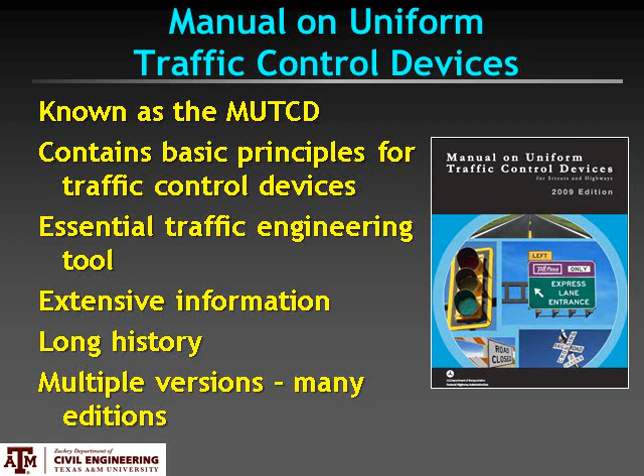And the 862 pages in the 2009 edition, which is the current edition, contain a great deal of information about the meaning, design, selection, installation, operation, and maintenance of traffic control devices. And it has a long history. There have been 10 different editions of the MUTCD.

It started with the original 1935 edition. There was another edition put out at the beginning of World War II, the post-war edition. Then early in the 60s, a 1961 edition, early in the 70s, a 1971 edition, an edition in 1978, another one in 1988, the 2000 edition, the 2003 edition, and then our current 2009 edition.

Now, the history that goes into the MUTCD actually goes back all the way to the days of the Roman Empire, when they would mark these stone columns on the side of roads with the distance to Rome, which was obviously the center of the Roman Empire. And even in colonial America, they would put up these road markers that would show the distance to significant cities.

Now, of course, they didn't have paved streets and sidewalks and traffic signs and signals like you see in this picture, but this is an example of the type of colonial America road marker that might be on the side of a trail. And then automobile travel began in the early part of the 20th century. And as the number of automobiles increased, the need for more detailed and more useful traffic control devices grew.

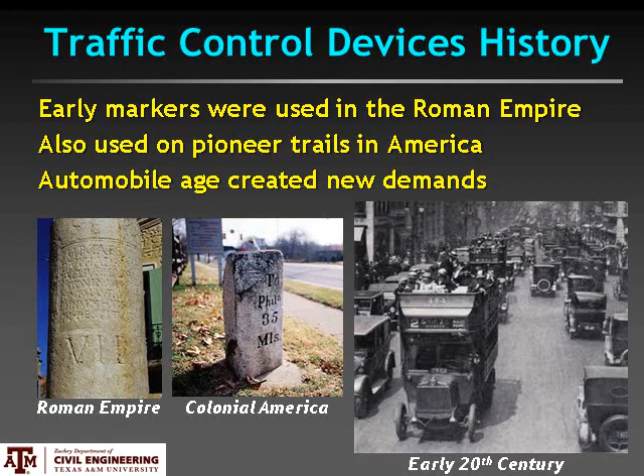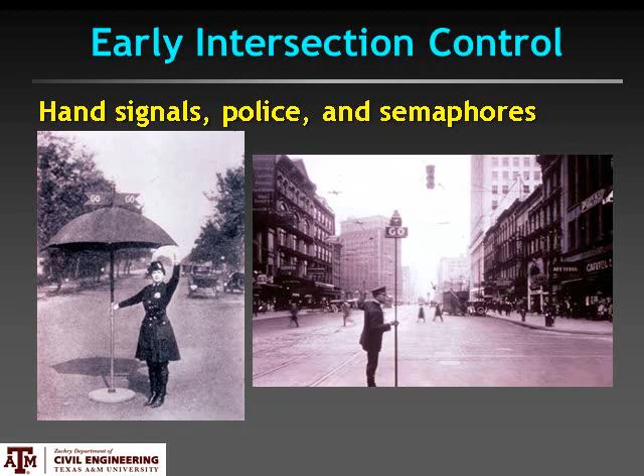Traffic signals and control at intersections was a big part of this early need for traffic control devices. When there were a relatively limited number of vehicles, they would put police officers in the center of the intersection, and they would hold up various types of semaphores and other signals that would be on a post, and you could see the word go from one street, and on the crossing street it would say stop, and the police officer simply rotated that 90 degrees back and forth to control the traffic at the intersection.

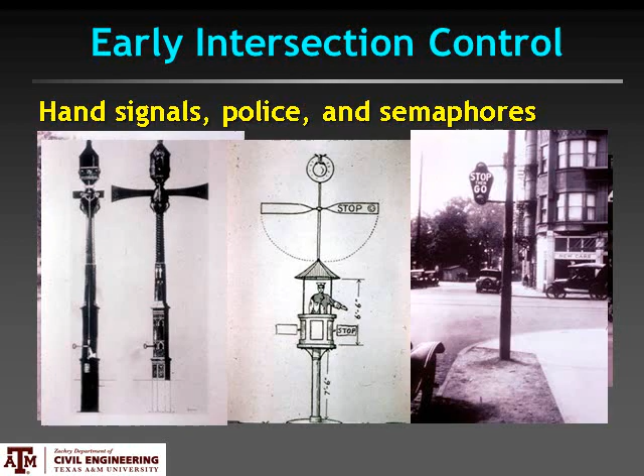The earliest signals were used in London, England, and used semaphores such as shown on the left. And then as the system progressed, we began to adopt some of the electrical indications that were used on railroads. And so we started seeing the red and green indications and the semaphore flags. And a lot of these were in towers or mounted on posts on the side of the road.

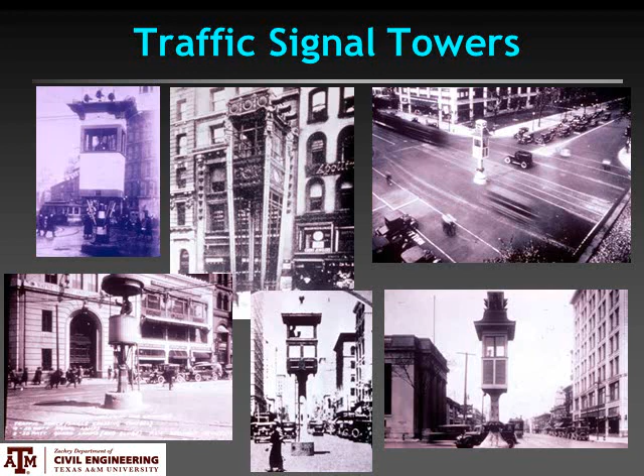In order to help the police officers see the traffic on the four approaches to an intersection, they started putting them in towers. And some of these towers were relatively low to the ground, others were really high. Some of them were real simple, others were very ornate. The signals were typically incorporated into the tower, and the police officers simply stood in the tower and looked at the traffic on each of the roads and decided when to change the signal for a given road from red to green and vice versa.

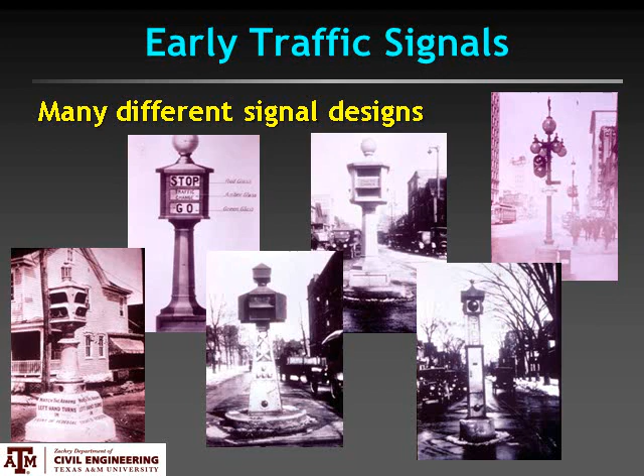Now, I said red and green because in many of the early signals, those were the only two colors that were used, and they weren't always round indications either. Sometimes they were rectangular, sometimes they were square. You can see here that some of them had word messages, some of them included a yellow interval, and some of them did not. So in the early part of the 20th century, all the way into the 20s and 30s, there was no standardization of traffic signal design.

Some of them had large numbers of indications. Some of them used combinations of semaphores and signal lights. And the position of the different colors was not even standardized. Sometimes you saw red on top, sometimes green was on top.

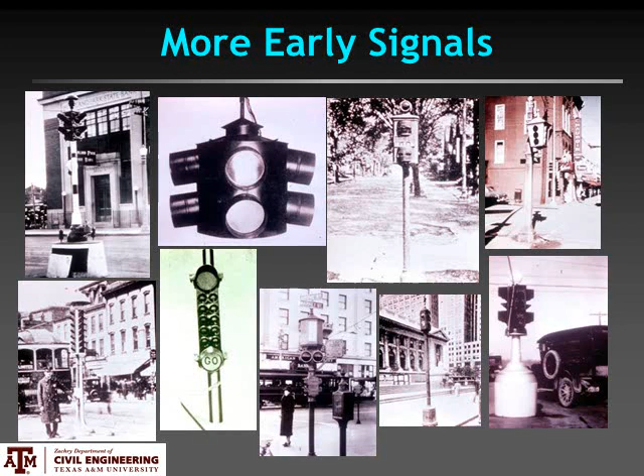Traffic signs likewise were not very uniform. The appearance of a sign took on whatever the designer of that sign, essentially the person that painted the sign, wanted it to look like. And so it was not unusual to see words like warning or caution or danger on many of the early signs. And in fact, police departments actually were responsible for many of the early traffic signs that were put out on roadways.

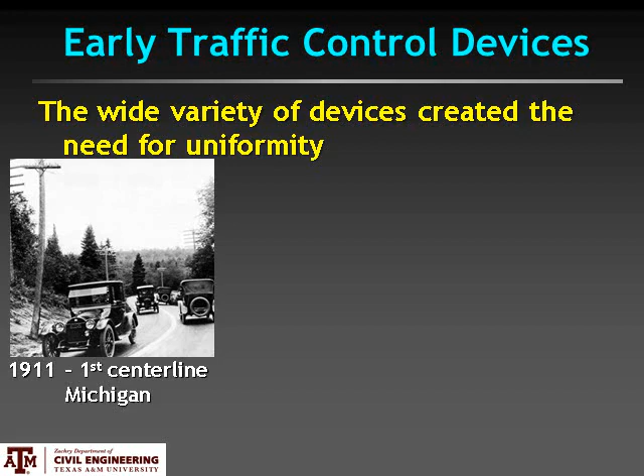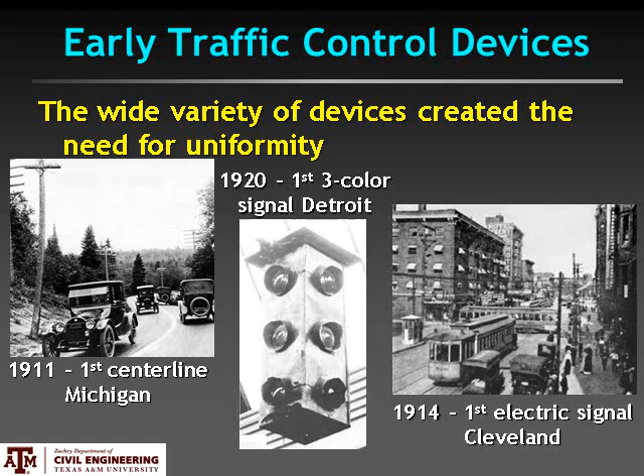One of the earliest, if not the first, traffic signal was installed in Cleveland. And it wasn't until 1920 that the first three-color traffic signal, the red, the yellow, and the green, was installed in Detroit.

One of the very first efforts toward standardization of traffic control devices occurred in 1923 when the Mississippi Valley Association of State Highway Departments came up with recommendations for the shape of signs. Their basic concept was that the number of sides on a sign represented the hazard level. And if you remember, I had said that railroad grade crossings represented the most hazardous condition in that era. And so what they said is a sign with an infinite number of sides, which is a circle, would be used to represent railroad grade crossings.

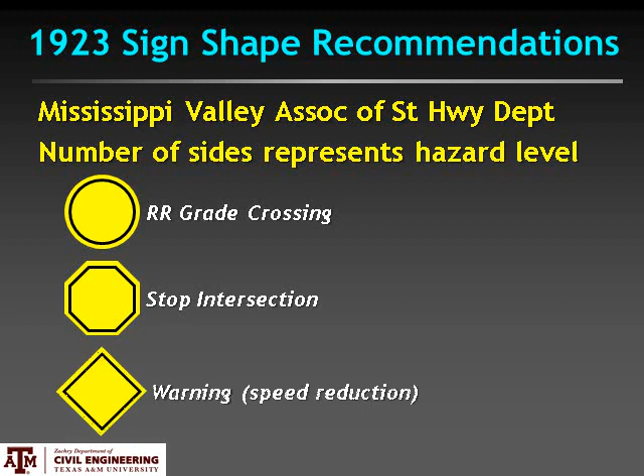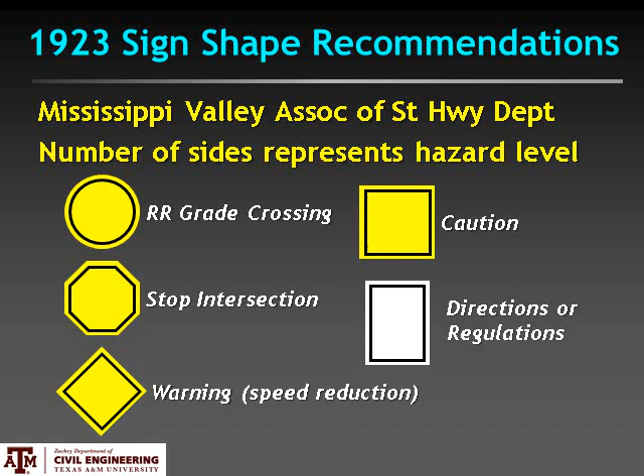And then the 8-sided sign, which is our stop sign, would be used to represent intersections where a stop is required. A diamond shape with 4 sides would be a warning indicating a speed reduction. A square that had 4 sides would be a caution condition, which is a hazard that the driver needed to be aware of, but that did not require a speed reduction. And then a rectangular shape would be used for directions or some sort of regulation.

And then a year later, the National Conference on Street and Highway Safety came up with color recommendations. They applied to both signs and signals, where red means stop, green means proceed, yellow means caution, white would be for directions or distance, and they recommended purple as an indication of an intersection. Now, that's the one color that ended up not ever really being implemented.

Those sign recommendations then evolved into an AASHO publication, which represented the very first national manual of any type on traffic control devices. It only addressed signs and only for rural areas, and the title of that was Manual and Specifications for the Manufacture, Display, and Erection of U.S. Standard Road Markers and Signs. And when they say road markers, they were not talking about pavement markings, but U.S. route markers.

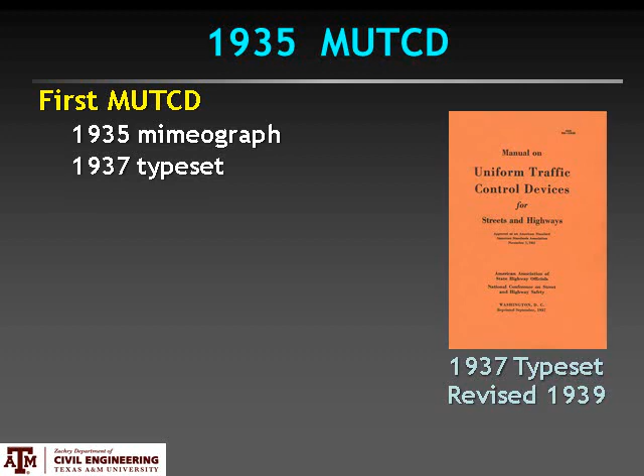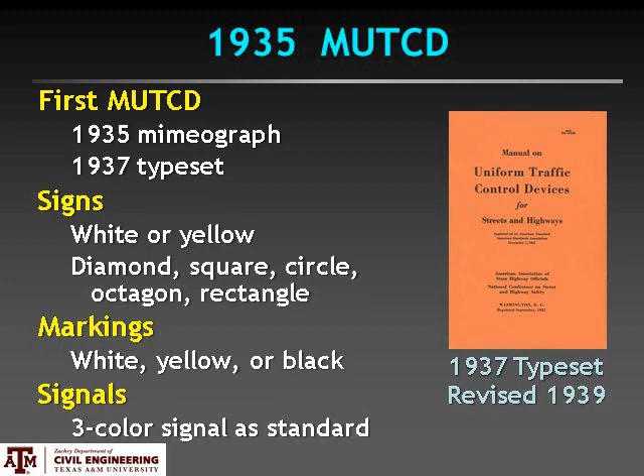Now, the content of this first MUTCD said that signs were either white or yellow, and it defined shapes for signs that were either diamond, square, circle, octagon, or rectangle, and I've already talked about what most of those shapes related to. Markings could be white, yellow, or black, whichever color provided the most contrast on that pavement. But the 1935 manual did do one important thing for setting standards, and that is it defined a three-color signal as the only acceptable design for a traffic signal.

And they outlined the shape of the signs because the idea was the drivers would know what to do in response to the sign once they figured out what the shape of the sign is. Only a very few legends actually had the cat's eyes in them.

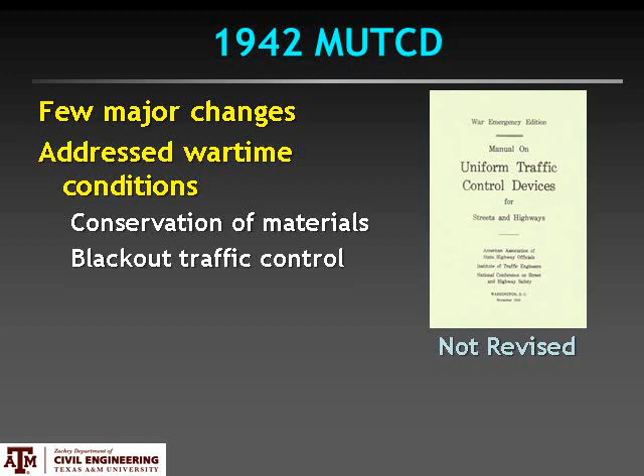And then, beginning of World War II, there were many challenges associated with traffic control during wartime conditions. And so they published the War Emergency Edition of the MUTCD. And the primary change from the previous version that was in this manual is that it dealt with conservation of materials, so it allowed agencies to leave devices out longer than maybe they should have in order to conserve materials. And it added a section on traffic control during blackout conditions.

And the blackout conditions essentially meant that you drove your vehicle with most of the headlight covered up, only a small slit to allow light to escape. Traffic signals were operated at about 20% of the voltage that they would normally use. And so it was very difficult to see. In fact, during blackout conditions, before you would actually start driving your vehicle, you're supposed to sit in it for about 20 minutes to allow your eyes to adjust to the dark conditions.

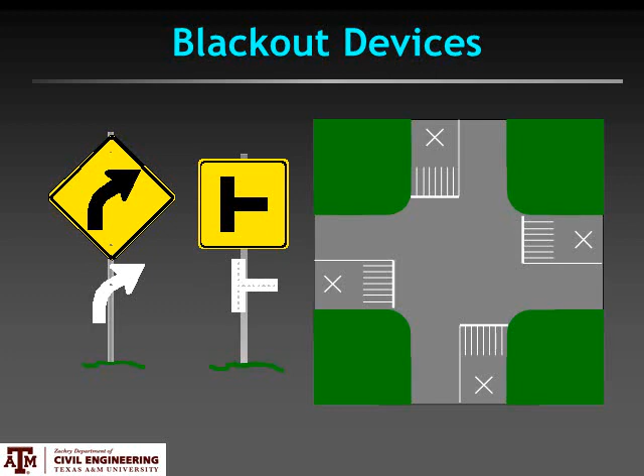And so with signs, they would take the legend of the sign and put it as a separate legend copy lower on the post and do something to make it retroreflective. At intersections, they would put the cone type markings in the intersection and put an X on the approach to the intersection so that you would know you were coming up to an intersection.

With the end of World War II, traffic engineers began working on a new version of the MUTCD, and it was published in 1948. It represented a significant rewrite from what really was a 1935 MUTCD. And in this new manual, there were a lot of changes to traffic signs. They simplified the legends that were in a large number of traffic signs. The caution sign that had been square that was in the 1935 and 1942 MUTCDs was deleted from the manual. They did add the square advisory speed plaque, and this is the little sign below a curve sign that tells you what speed is recommended for that curve.

And they changed from the block letter alphabet that I had been talking about earlier to a rounded letter alphabet. And this was possible because at this point in time, they had moved away from embossing signs and were instead painting the letters on retroreflective sheeting as opposed to embossing them in the steel.

They made a number of changes to pavement markings. They started to define that the color yellow would be used only for a double center line or for the solid yellow line that indicates the no passing zone, and that everywhere else white was to be used. And the edge lines that we see today are actually not recommended in the 1948 MUTCD. And this manual also simplified the signal warrants that had been in the previous editions to make them a little more usable. And the 48 manual was revised one time, 1954, but that was a very significant revision, and I'll talk about that in a couple of slides.

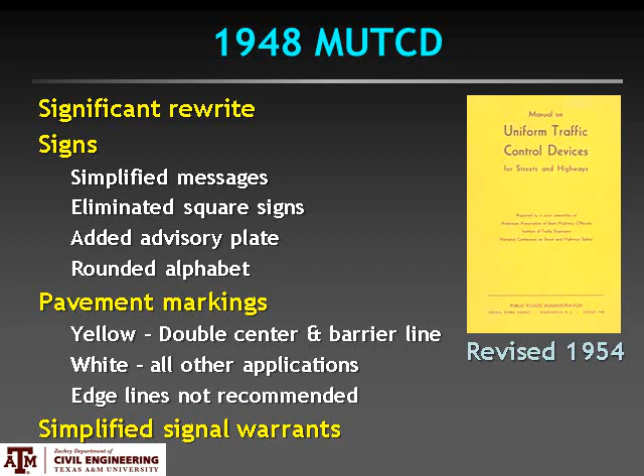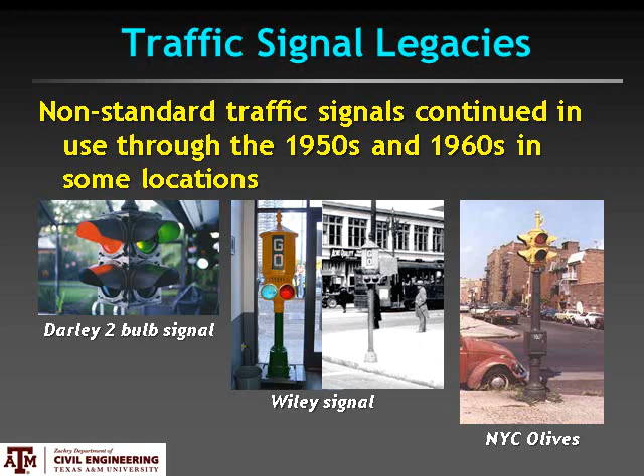And also during the 1950s, we started seeing the growth of the interstate highway system, and with that came the demand for improved traffic signing and pavement marking for these highways because they were high speed, long distance travel. And so the Bureau of Public Roads started doing research in the early to mid 50s, and most of that was published in the mid to late 50s, dealing with issues like pavement markings and freeway guide signs.

And this manual was first published in 1958, and that is where we got the use of green for traffic signs, because it introduced the white on green guide signs. This is the first time we started seeing lowercase letters used in traffic signs. It also recommended guide sign or service signs that used a green letter on a white background. It recommended much larger sign sizes because of the higher speeds.

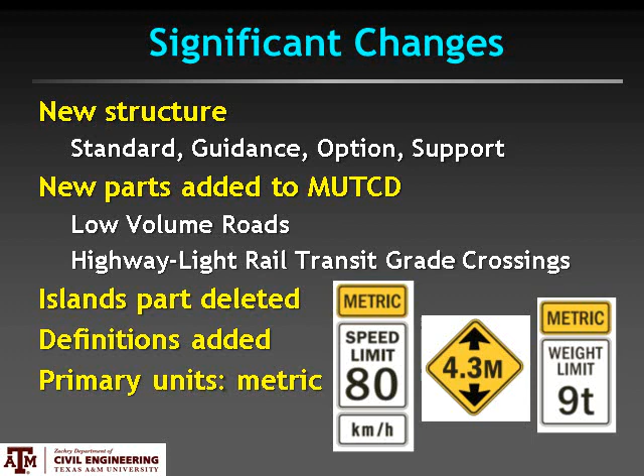They changed the crosswalk sign. Prior to the 2000 edition, there were two versions of this. One of those versions had two horizontal lines in it that symbolized the crosswalk itself. But road users couldn't tell the difference between the advanced sign without the crosswalk lines and the sign at the crosswalk with the crosswalk lines. And so they eliminated the crosswalk lines and started using the diagonal down arrow for the pedestrian crossing itself.

They added the yield line marking. These are sometimes called shark's teeth marking. They also added a section on in-roadway lights.

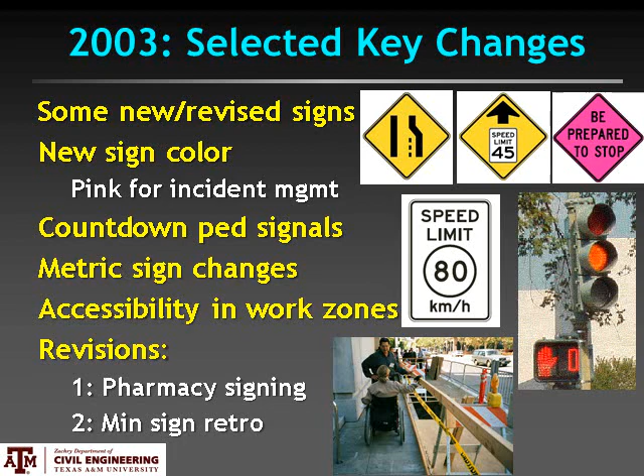And then the 2009 manual, which is our current manual, was published in late 2009. The rulemaking for this particular edition received more comments than any other manual that had ever been proposed. There are over 1,800 individual letters, and when you break down all the comments contained in each of those letters, it totaled to over 15,000 comments. And in the final rule itself, it lists 611 significant changes between the 2003 and 2009 MUTCDs.

So there were some philosophical changes in the 2009 manual. A few of those are increased emphasis on uniformity, trying to promote the complete street concept that provides for all road users, trying to address the needs of the aging road user population, and to provide a little more opportunity for innovation with respect to traffic control devices.

This manual is much more specific than previous manuals. There was a reduction in many of the options that were available for traffic control devices, and in some cases increased specificity as for what was required or recommended. They restructured compliance dates, and compliance dates are when changes in the manual have to actually be complied with, and an emphasis on making sure that whenever you do a systematic upgrade of your devices that you bring them into compliance with the manual.

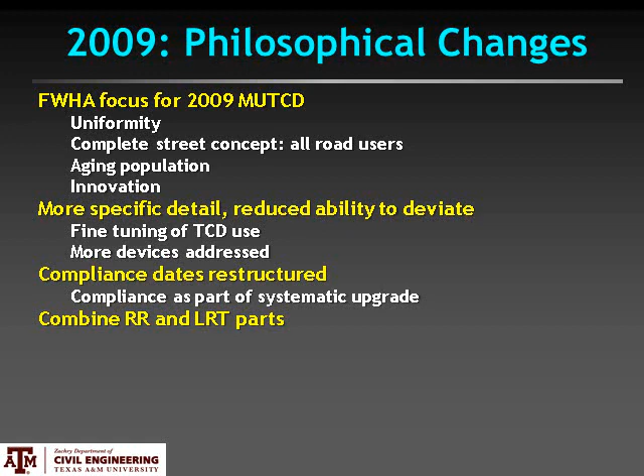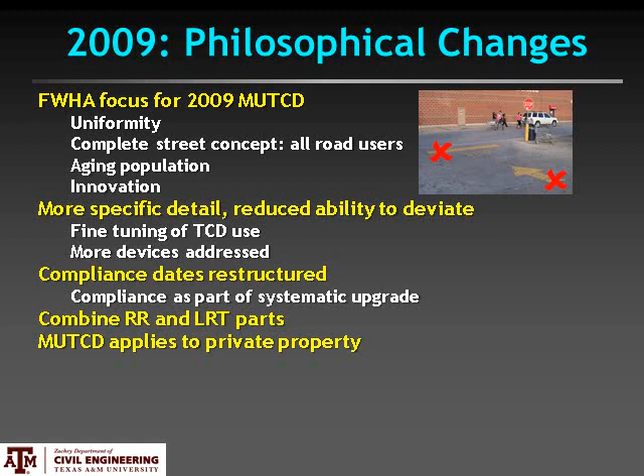They combined the railroad and light rail grade crossing parts that in the 2003 manual had been separate parts. They combined those together into a single part, and they also specified that the MUTCD applies to private property that is open to public travel. And so things like yellow pavement markings on the pavement within a shopping center parking lot are no longer considered appropriate. They need to comply with those requirements that are in the MUTCD, which in this example would be white markings.

And they added some new content. Some of that dealt with managed lanes and toll roads, and it introduced the use of the color purple to deal with electronic toll tag collection. And for the first time, added content to the MUTCD dealing with the design and operation of changeable message signs.

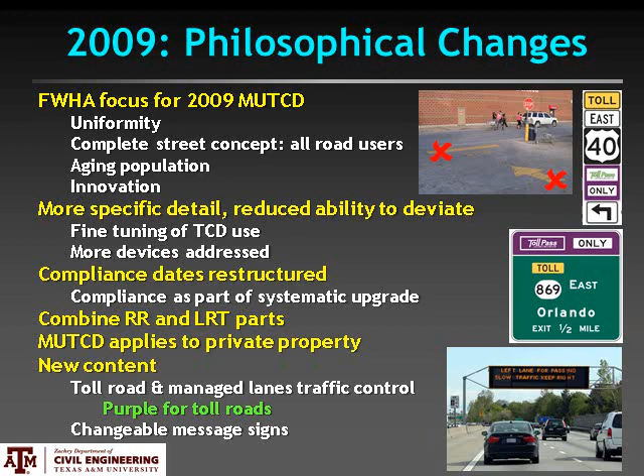A few other key changes associated with the 2009 manual. It's the first version of the manual to actually have numbered paragraphs. The guidance statements were italicized, and since the United States did not go metric, they got rid of the metric units that were in the MUTCD in their two previous editions.

When it was originally published, the 2009 manual included a statement that said, standard statements shall not be modified or compromised based on engineering judgment or engineering study. And I'll talk about how that was addressed in one of the manual revisions here in just a minute.

It changed the legibility index from the 40 feet per inch that was in the 2003 manual to 30 feet per inch. It increased the required size for a lot of signs. A good example of that is the size of stop signs increased from 30 inches to 36 inches in many situations. It increased requirements for the use of one-way signs. It increased the requirements for the use of signs that warn of changes in horizontal alignment, turn and curve signs, and made them required signs in certain situations.

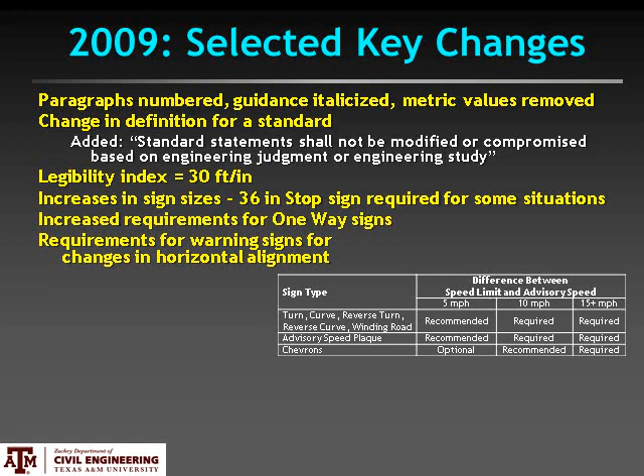It introduced the arrow per lane guide sign and made that an optional sign for new installations. And it also addressed the use of high visibility safety garments and has specific requirements for what type of these garments are acceptable to be using within the right-of-way, and also specifies that everyone that is a worker within the right-of-way has to wear these types of garments, including someone from the media that's there to report on a crash scene, or a tow truck driver, or any number of other workers.

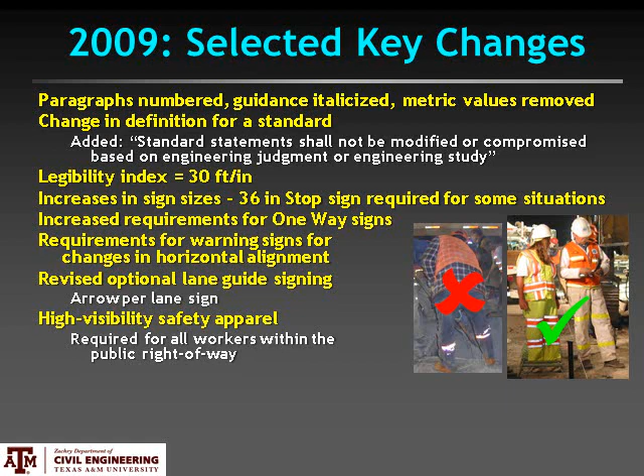They changed the rules for school signs. Previously, school signs could be the yellow-green or the yellow. With the 2009 manual, they're required to use only the yellow-green color. And they changed the rules for ending a school speed limit. In prior manuals, you could just put up a speed limit sign to indicate the end of a school speed zone. With the 2009 manual, you have to have the end school zone sign to indicate the end of that school zone.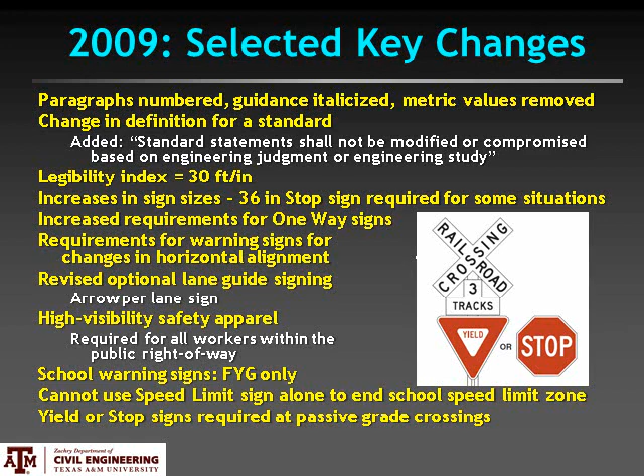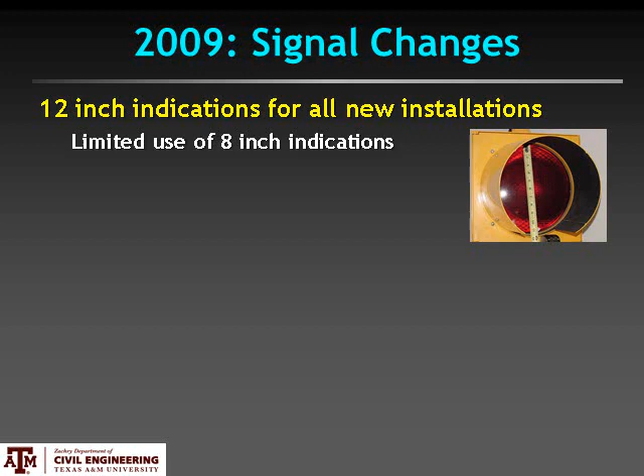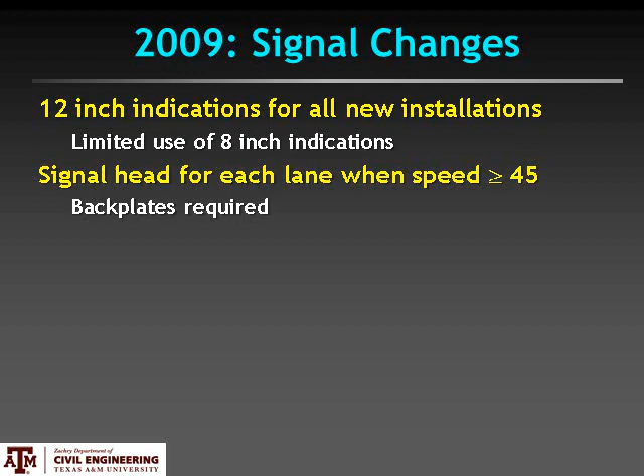And on grade crossings that had no active control, in other words, no flashing lights or arms, now you end up needing to put up either a yield sign or a stop sign at these grade crossings. There were a number of changes to traffic signals. The 2009 manual limited the use of 8-inch signal indications to some very limited and specific situations. Requires a signal head for each lane on a roadway when the speed is 45 miles an hour or higher. It also requires back plates.

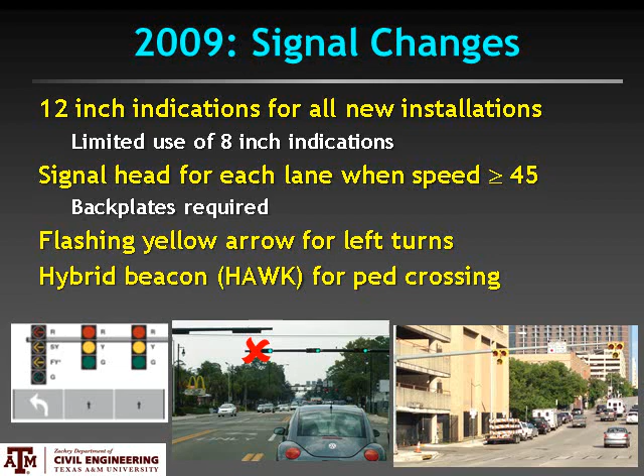It is specifying the use of the flashing yellow arrow for left turns. This is a treatment that was researched in the 90s and throughout the early 2000s, and finally implemented in the 2009 manual. No longer can you use the green ball for a yield movement within a left turn signal head. And it also introduced what's called the pedestrian hybrid beacon, or the HAWK signal, for pedestrian crossings.

It has been revised twice. I made reference to this first revision, and that's where they addressed that definition of a standard and deleted that statement that was in the original 2009 manual that says standard statements shall not be modified. They also restored language to the 2009 manual that says that the manual is not a substitute for engineering judgment. And these two changes combined allow deviations from a standard statement in limited site-specific situations where it's appropriate to do so and where it's documented in an engineering study.

The second revision that came out at the same time changed compliance dates. In fact, they deleted most of the compliance dates that were in the original 2009 manual, and of the dozen they retained, they actually modified the dates for several of those. That's where we are today on the history of the MUTCD. We're looking at the future of the manual and hope to have a video on that at some point in the future.